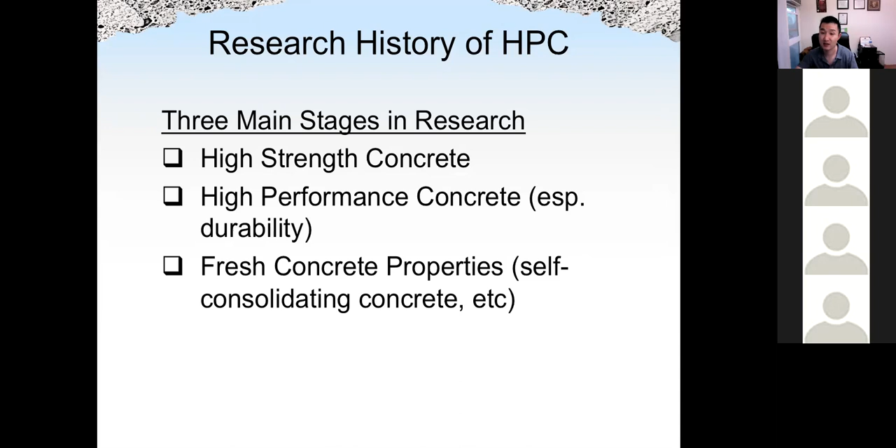For high-strength concrete, the goal is of course to enhance the strength as much as possible. This is useful for high-rise buildings, because by using higher strength concrete we can reduce the cross section of the concrete, and thus reduce the dead load of the building.

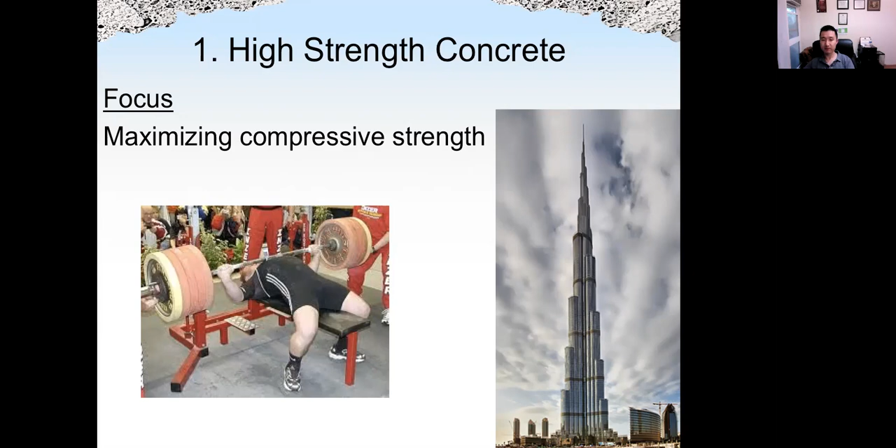But as we mentioned before, high strength is not equal to high durability. Some very old concrete may not be as strong as today's high-strength concrete, but they can last hundreds or even a thousand years. If a high-strength concrete has durability issues, it cannot last long. For example, concrete with high drying shrinkage or high autogenous shrinkage—even though the cement paste is very strong, shrinkage will cause a lot of cracking, which makes the high-strength concrete not very durable.

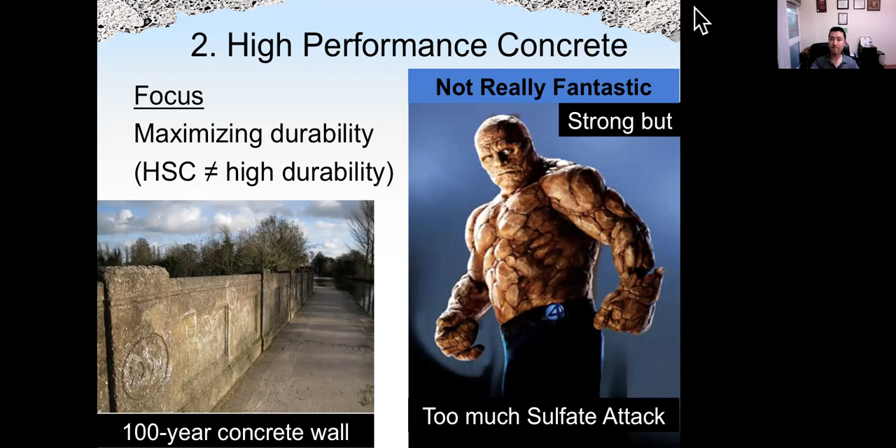If the focus is on high fresh properties, such as self-consolidating concrete, it can also be qualified as high-performance concrete. SCC will be one of the concretes we talk about in future lectures—it's a type of concrete which can flow under its own weight, can pump over a long distance, and can flow into every corner of the formwork. It's useful especially when we have very congested rebar in the formwork.

So I'll try to play a video for us, we'll see if we can play that.

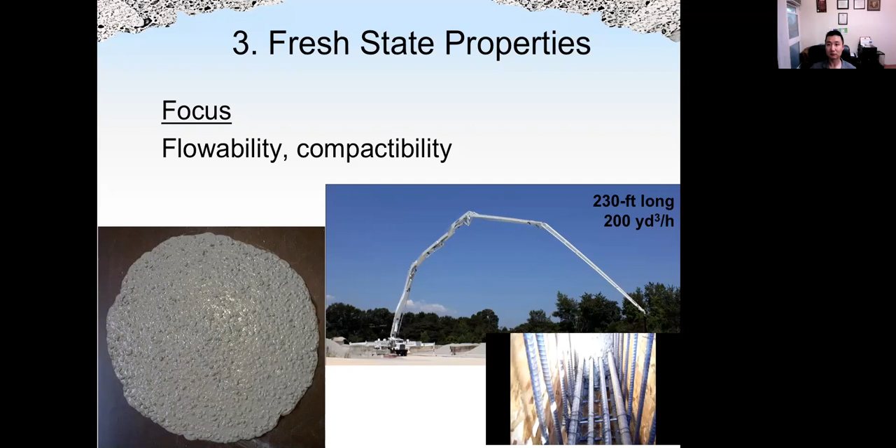To design high performance concrete, depending on what type of performance we design for—either high strength, high durability, or high flowability—we should focus on processing technology, the properties of the raw materials and final products, and properties based on chemical analysis and nano- and microstructure analysis of the concrete materials.

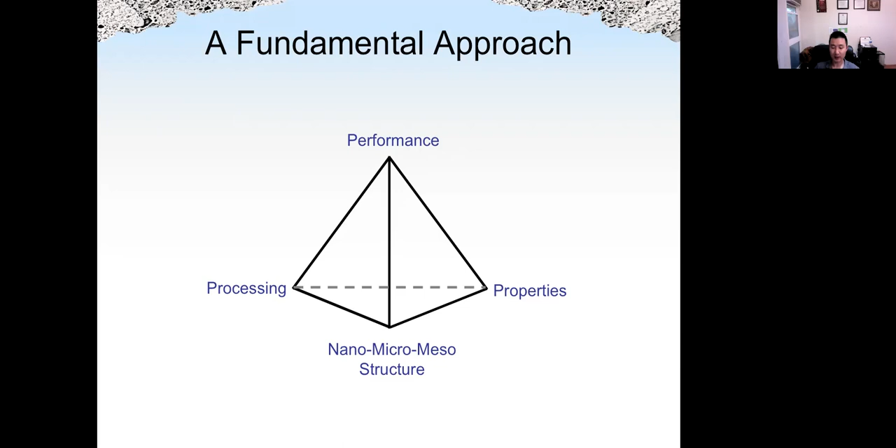Here we compare conventional concrete, high-strength concrete, and so-called ultra-high-strength concrete, depending on the strength level. We can see the water-cement ratios are quite different, and some use chemical admixtures such as superplasticizer to achieve high strength, because without superplasticizer it's very hard to achieve a very low water-cement ratio and fully compact the concrete.

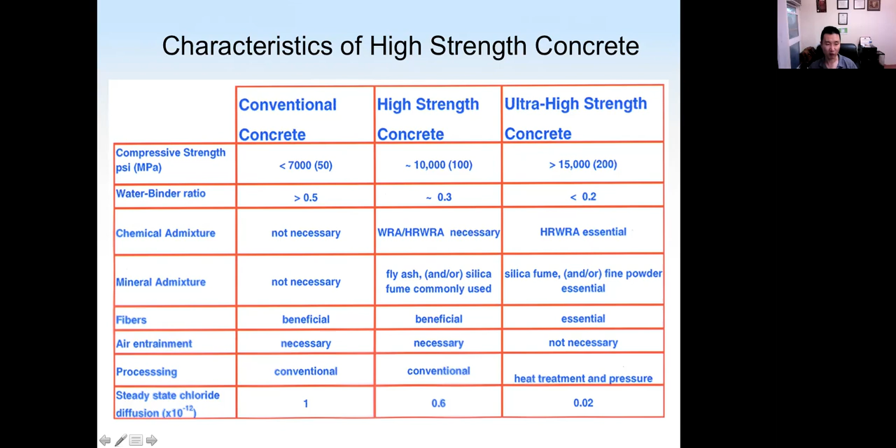Silica fume and fly ash are commonly used for high-strength concrete. Sometimes fibers are also used to enhance toughness—we will have a lecture covering fiber-reinforced concrete later this semester. We may also use heat treatment and even pressure to achieve ultra-high-strength performance.

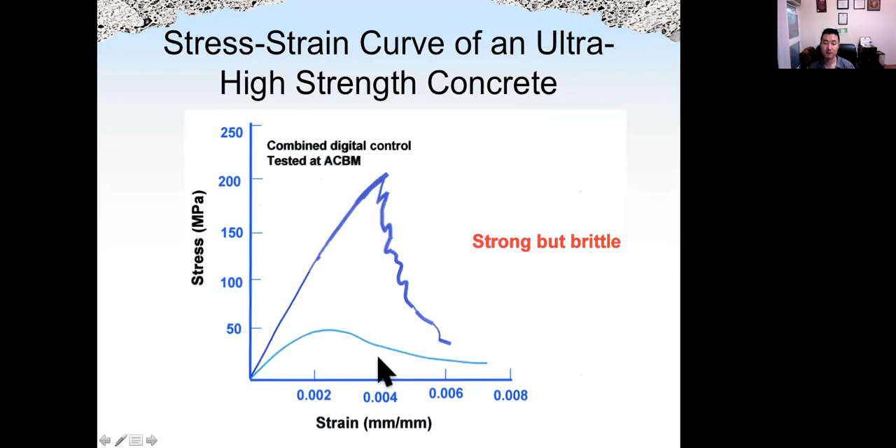This is what we discussed, the crack behavior for normal concrete. We call that crack localized. The cracks open up in a certain location, not all of the location, and in other parts of the concrete, even after the peak load, the concrete can still resist some of the load. That's why we have the post-peak behavior.

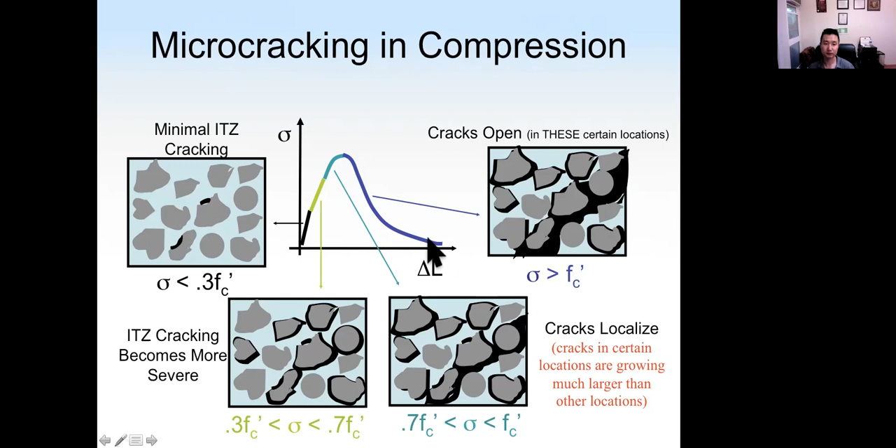But for high-strength concrete, all the components are very strong, so when cracks occur, they tend to propagate all through the concrete. So there's not too much post-peak behavior. High-strength concrete behaves more similar to cement paste or mortar compared with traditional concrete.

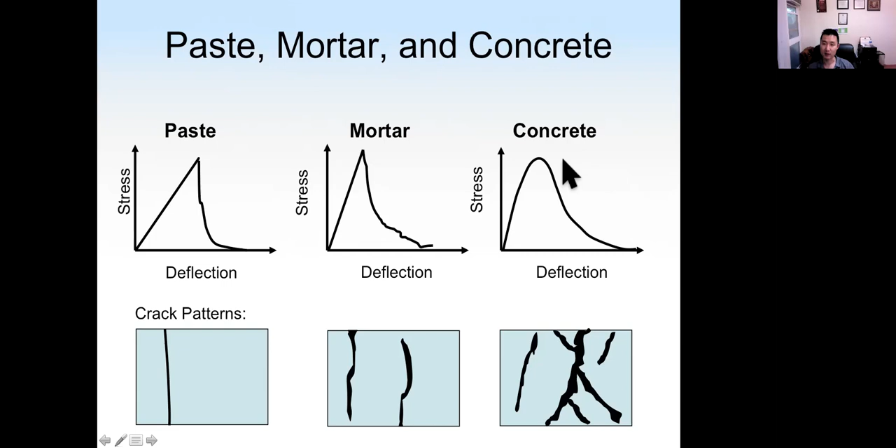This is one of the early projects, around 2008 to 2009, that I did before I joined UH as assistant professor in 2011 — around 2 or 3 years before I joined UH. This is one of the projects: we designed ultra high strength concrete, which also has fiber in it.

The concrete needs to be strong enough to resist high-speed heavyweight truck impact, and also durable enough to resist the harsh marine environment. This is one of the security barriers in the San Francisco Bay Area.

We use particle packing theory trying to achieve a very dense matrix, not only for aggregate but also for the powder system, which means the cement and silica fume system. We focus on rheology behavior using admixtures and fibers, and also study the cement chemistry to ensure the hydration product is strong enough.

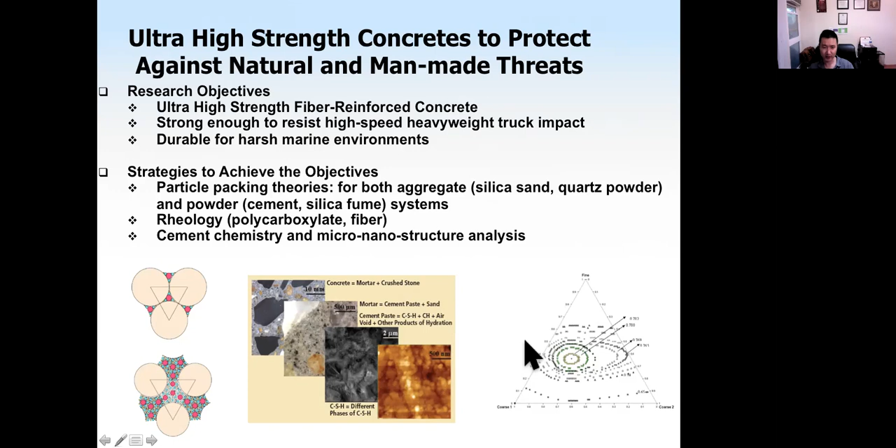The end result is ultra high strength fiber reinforced concrete with compressive strength more than 200 megapascal, very high flexural strength, and very, very low chloride diffusion rate, which means the concrete will be very durable also.

I'm not sure if I can play the video. The video seems not to work today. We have some video clips — hopefully I can play that next time for you.

This is the prototype test with a Ford F750 truck, a 15 kip truck traveling at 50 miles per hour, impacting the concrete barrier, which will serve like so-called street furniture. We have some plants on top of the concrete barrier and people can sit on it, but it's actually a very, very strong security barrier that can stop the truck within 3 feet, or 1 meter.

So this is some of the pictures of the impact.

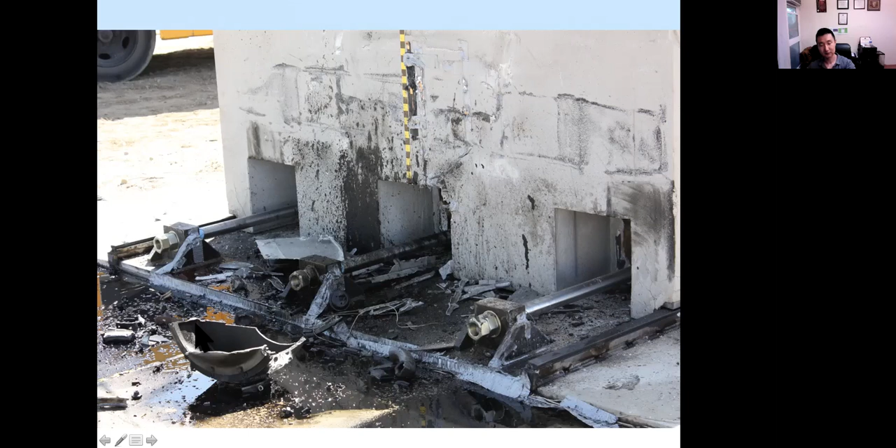The next part of today's lecture is borrowed from a lecture by Professor David Lange, who I think is currently the ACI president and a professor at the University of Illinois. He was my co-advisor for my PhD study. This is one of his lectures on designing or production of high performance concrete.

Basically, how can we achieve a strong and durable concrete? You will see a lot of this information already in this lecture — we know it already — but it's a very, very good review on designing high performance concrete.

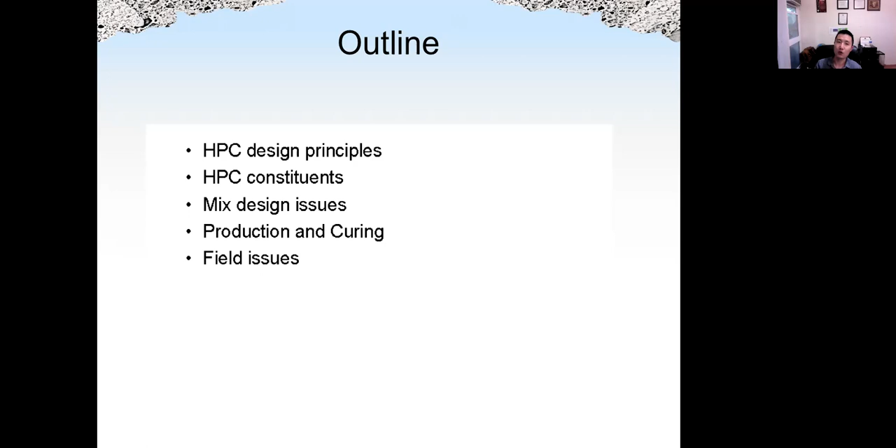HPC design principles: for hardened properties, we need to focus on a very strong matrix, which means the cement paste needs to be strong enough, the interface, meaning the ITZ or interfacial transition zone, and of course the aggregate.

Porosity controls the permeability, and the connectivity of the pores is also a big factor controlling concrete permeability. We know concrete permeability is very, very important for designing a durable concrete. And volumetric stability, meaning the creep and shrinkage of the concrete, should also be well controlled.

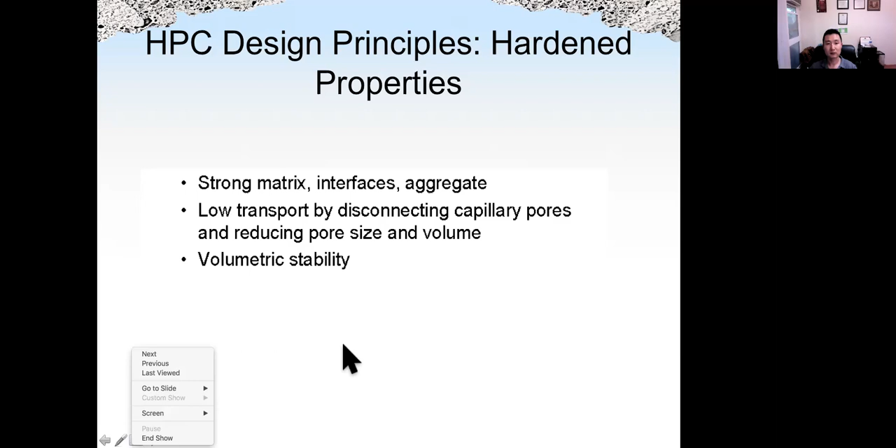So that is hardened properties. For fresh properties, the workability should be at least acceptable. For concrete with very low water cement ratio, it cannot be very flowable, but it should be at least workable, meaning we can fully compact the concrete.

The setting time should also be acceptable depending on the requirement of the engineers. That is controlled by the type of cement, the particle size or fineness of the cement, or what type of admixtures we put in the system.

Also the rate of strength gaining is controlled by the type of cement. For example, type 3 cement, we call that high early strength cement, so the set time and strength gaining speed will be faster compared to type 1 cement. Temperature is also very important — higher temperature means higher strength gaining. Set controlling admixtures, retarders and accelerators, will all control the strength gain.

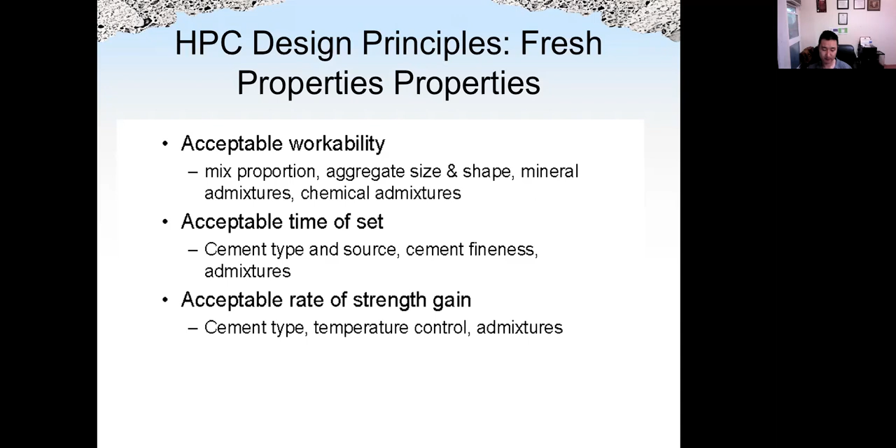How can we improve the strength of concrete? We have many methods to do that. We can improve the strength of the cement paste, the ITZ, or the aggregate. Remember the weakest link series - these are the three major components in concrete. We need to improve the weakest part, depending on many factors. If the weakest part is the cement paste, we should improve that. If the weakest part is ITZ, we should improve ITZ.

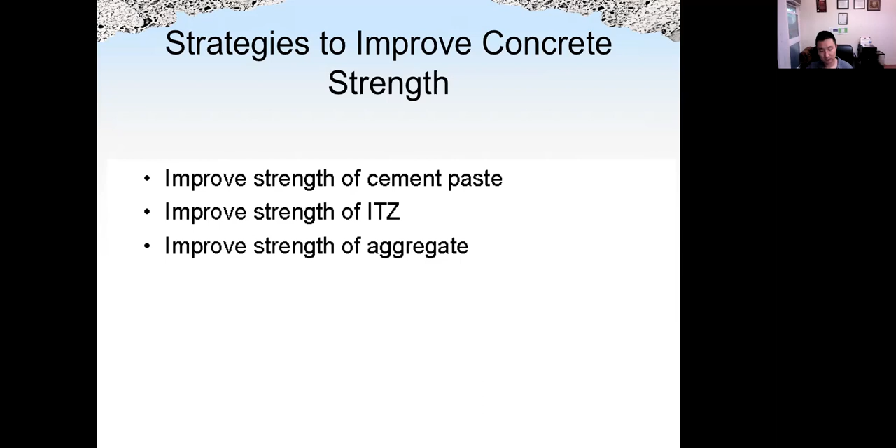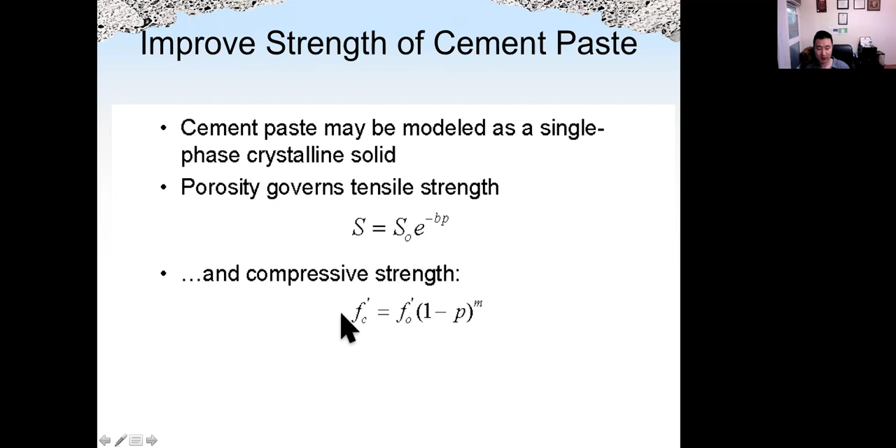For the cement paste, it could be modeled as a single phase solid. The strength of the cement paste depends mostly on the porosity, which is the P here. The lower the porosity, the higher the strength of the cement paste. So the main problem is how we can reduce the porosity, avoid larger pores, and refine the size of the hydration or the grain. If we can reduce the inhomogeneities, reduce the size of the interface, reduce the size of voids, we can reduce the major issues.

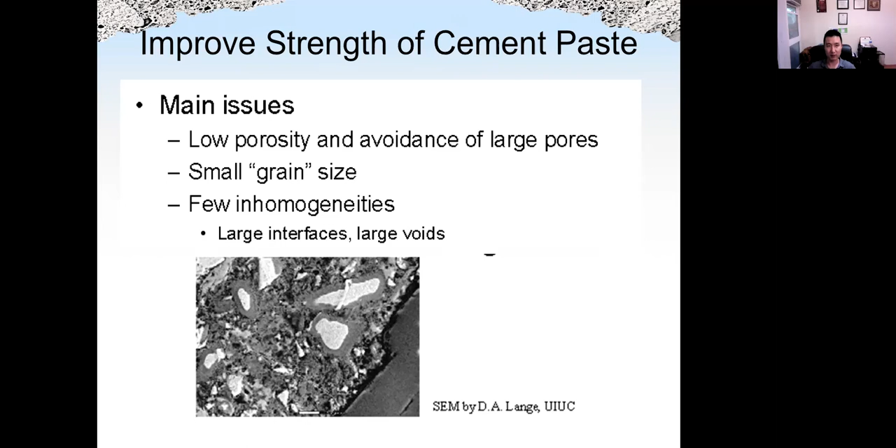The role of water-cement ratio: the water-cement ratio is the number one factor controlling the strength of concrete. Higher water-cement ratio means lower strength. Lower water-cement ratio gives us higher density and higher strength, but the setting time will also be shorter, and we have higher temperature due to higher heat evolution. The workability will of course be lower. That's why for high strength concrete, we need to put a superplasticizer in the system.

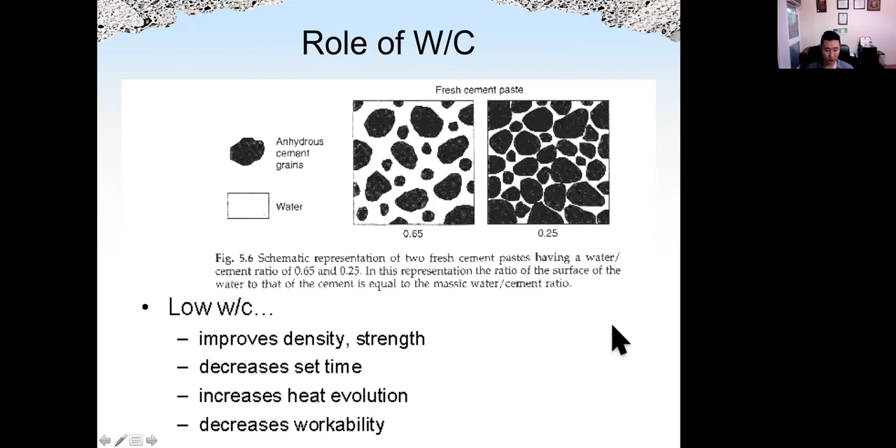So that is cement paste. Now let's look at the ITZ, which is the boundary between cement paste and the aggregate. ITZ is typically weaker if the water cement ratio is high, higher than 0.5, then we could have micro cracking in the ITZ due to drying shrinkage or thermal contraction. It's said that aggregate plays no role until the water cement ratio is less than 0.5 - that means when the water cement ratio is high, the weakest link is in the ITZ or the cement paste, so aggregate plays no role.

When the ITZ and the cement paste are strong enough, or stronger than the aggregate, then it will play some role to control the strength. The aggregate needs effective stress transfer - without a strong ITZ, the stress from the cement paste cannot transfer to the aggregate.

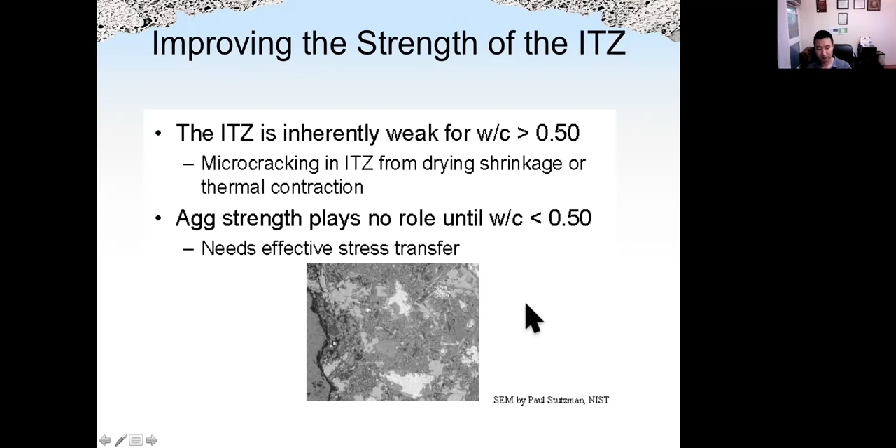For cement, optimum fineness: the smaller the particles, that is good for strength, but too fine is bad for rheology, because we need more water to mix the cement paste. Smaller particles have higher surface area, so we need more water to achieve the same workability.

If we can reduce the amount of C3A, we could avoid some setting problems. A higher percentage of C3S and C2S lets us generate more CSH and improve the strength of concrete. ASTM types are not optimized for high performance concrete due to high percentage of C3A, but that's probably not something we can control.

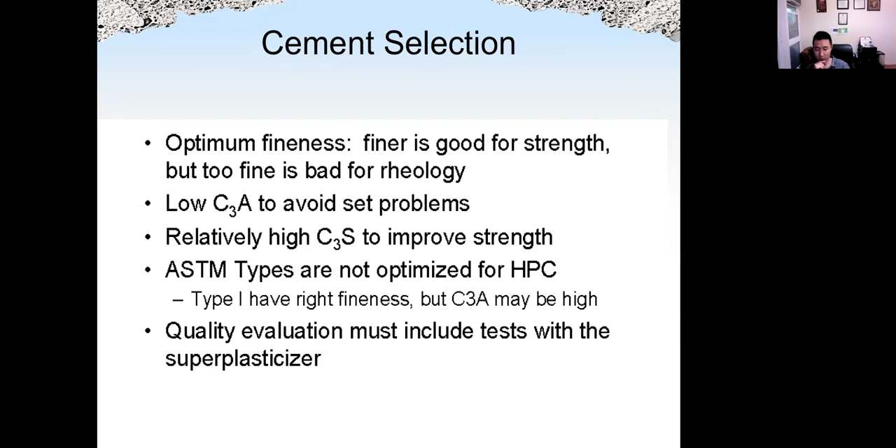For mineral admixture, such as fly ash and slag, we know the pozzolanic reaction transforms calcium hydroxide into CSH. That is due to the so-called filler effect - because Portland cement size is around 10 micrometers, and silica fume is around 100 times smaller, so silica fume can fill the gaps between cement particles. Fly ash has a more spherical shape, which can increase the workability of concrete. Slag is more angular shaped, and its size is also similar to cement particles.

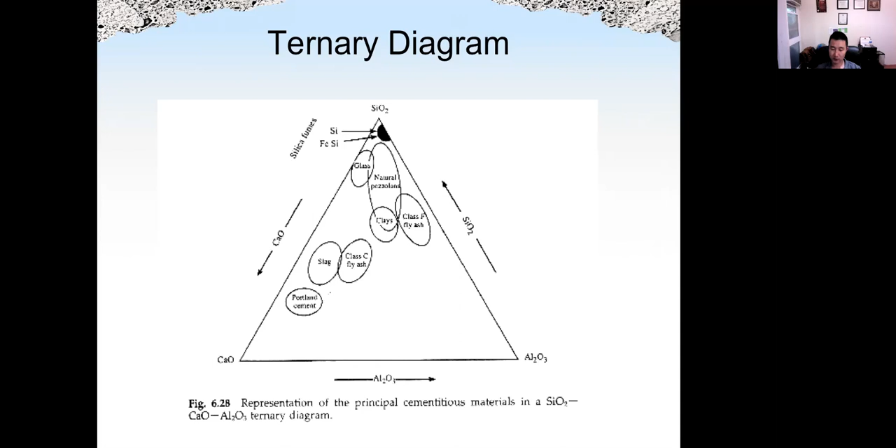For silica fume, the common dosage is around 3 to 10%. Sometimes we can use 15 or even 20%. But if we use too much silica fume, that will cost us a lot of superplasticizer, because silica fume is very fine particles, we need a lot of water and superplasticizer to achieve workable concrete.

The particle size for silica fume we know is very small, but it may stick together. We call that aggregation, so that will make the effective size of silica fume very large, sometimes even larger than typical cement particles. So that will impair dispersion or even generate ASR, because silica fume has a lot of reactive silica. So aggregation of silica fume, it may just act as the reactive aggregate. So pay attention to that.

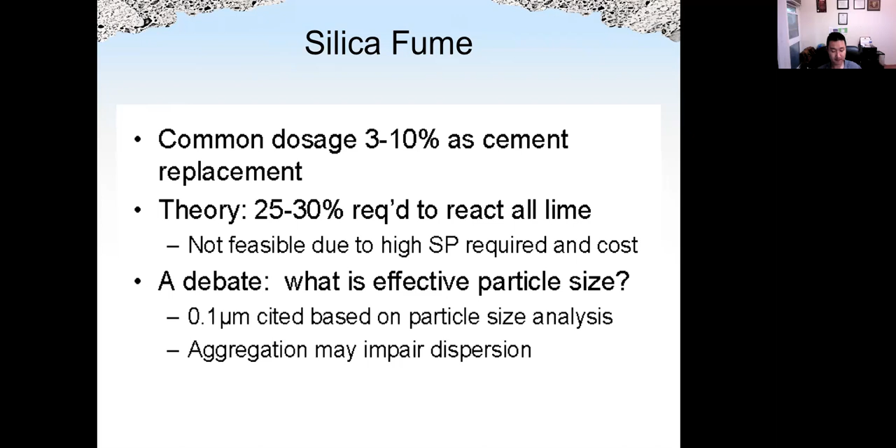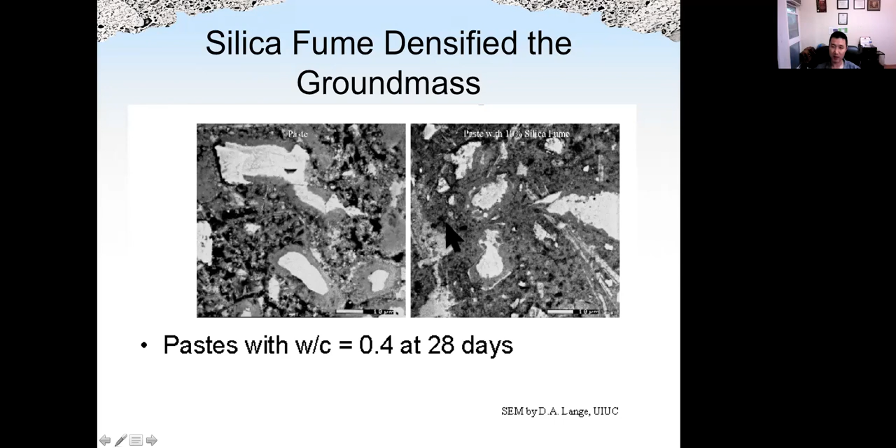For fly ash, the common dosage is around 15%, but we can use a much higher percent for now, even 100%. If you remember the guest lecture from the visitor on Tuesday this week, we can use up to 100% fly ash, but the quality will vary by source. Fly ash is a byproduct of coal burning process, so we need to care about quality control for fly ash.

It will increase the setting time and also reduce the early age strength of concrete. The cost of fly ash typically will be lower compared with cement, but that depends on where you're talking about. For example, here in Hawaii, the cost of fly ash is much more expensive compared with cement, about twice as expensive as cement, because we do not produce quality fly ash here in Hawaii.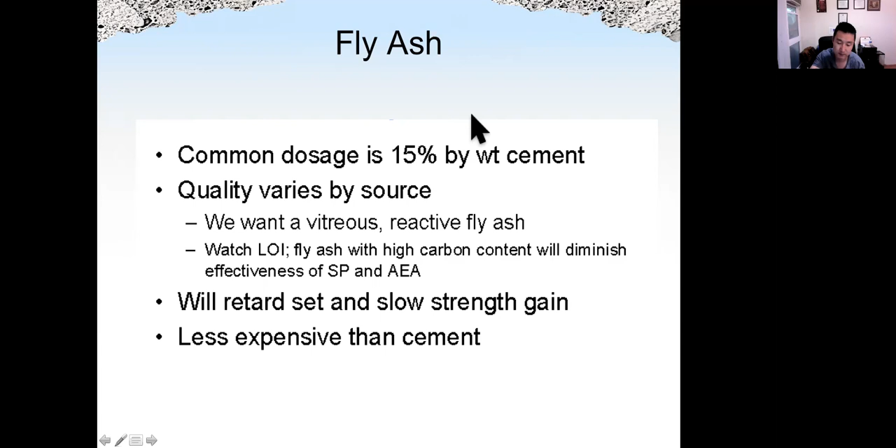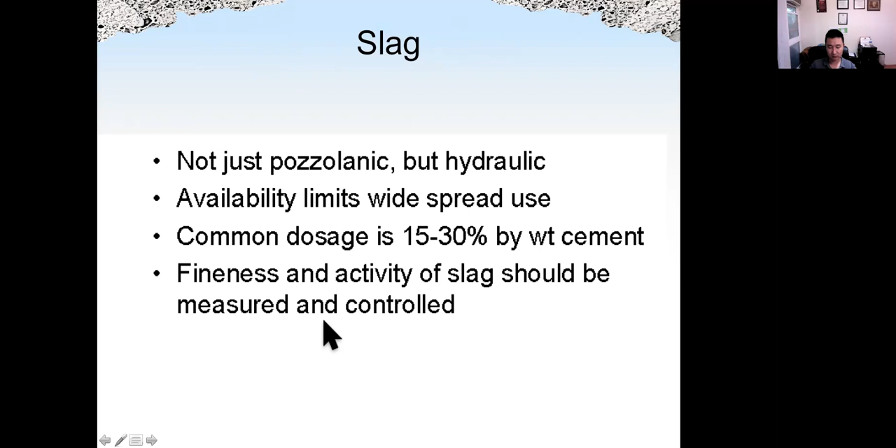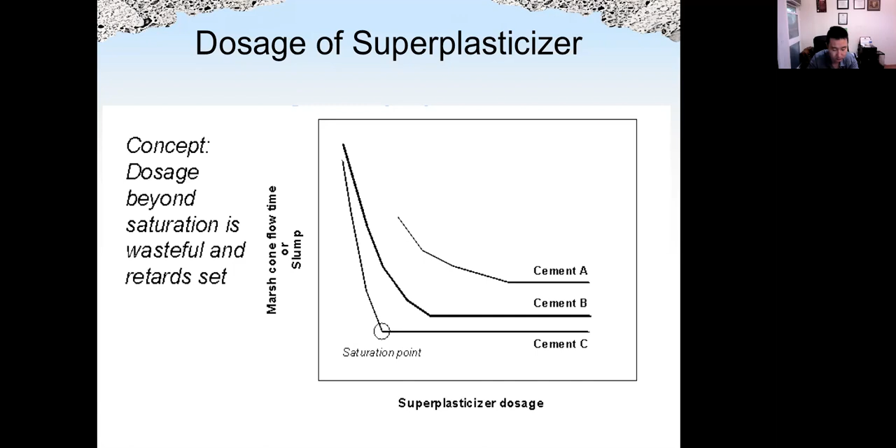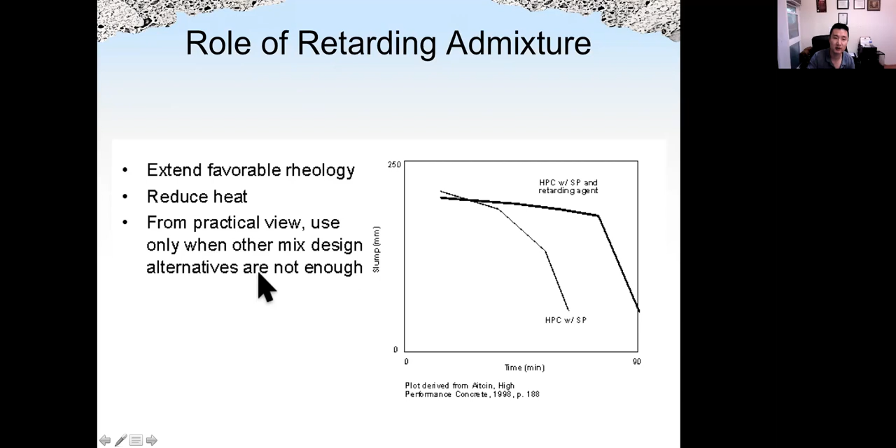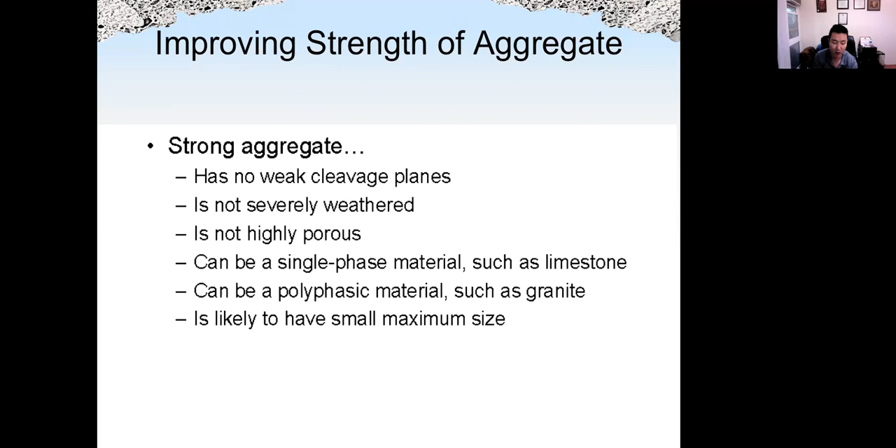And then let's look at the third component, which is aggregate. It can improve the strength of concrete. This may be important and may not be important. Here the strong aggregate has these properties, and the size of the aggregate will affect the strength of the concrete, as we know, and also the porosity.

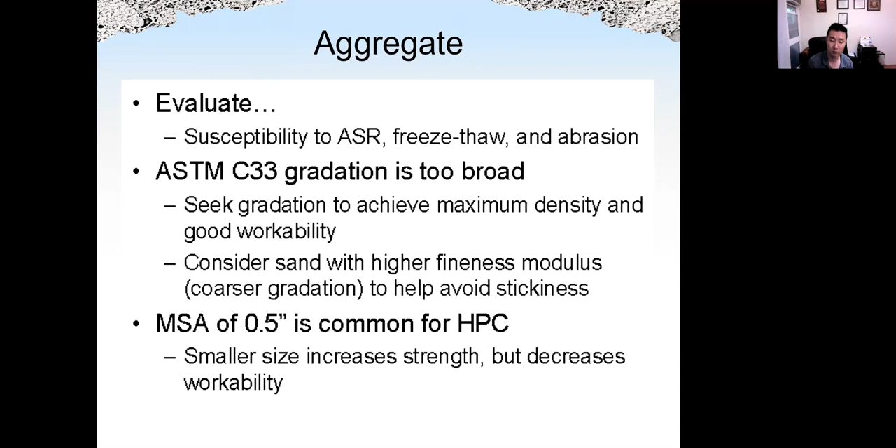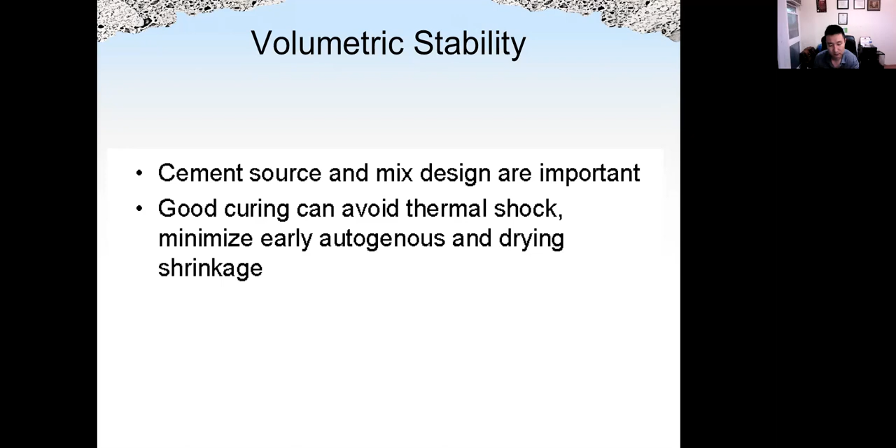From a lecture on shrinkage, we know for concrete with very low water cement ratio, it is very hard to control autogenous shrinkage, even with a lot of curing, because the cement is very dense. Water from outside cannot reach the drying pores caused by hydration. If we put in saturated lightweight aggregate, because the aggregate is everywhere inside the concrete, it will effectively reduce the autogenous shrinkage.

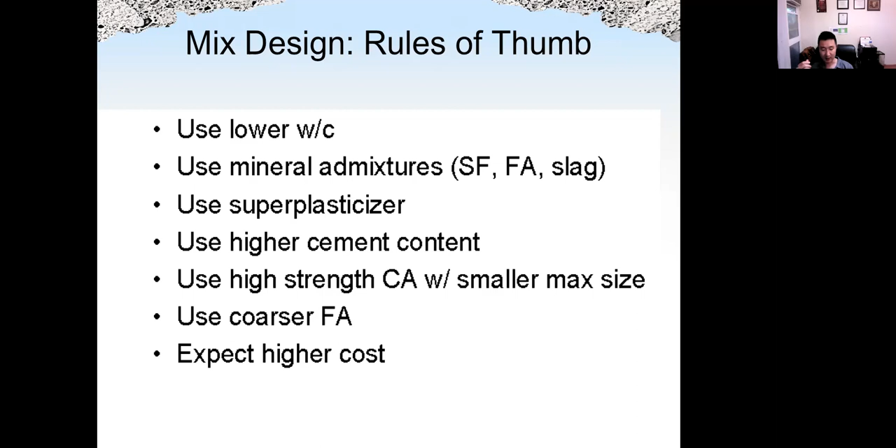So for high strength concrete or high performance concrete, the rule of thumb is we use lower water cement ratio if possible, use fly ash, silica fume, or slag, use superplasticizer if workability is a concern, and use higher cement content to compensate for the lower workability. Reduce the size of aggregate, use high strength coarse aggregate, and use larger size sand or fine aggregate. But the cost will be higher because of these materials.

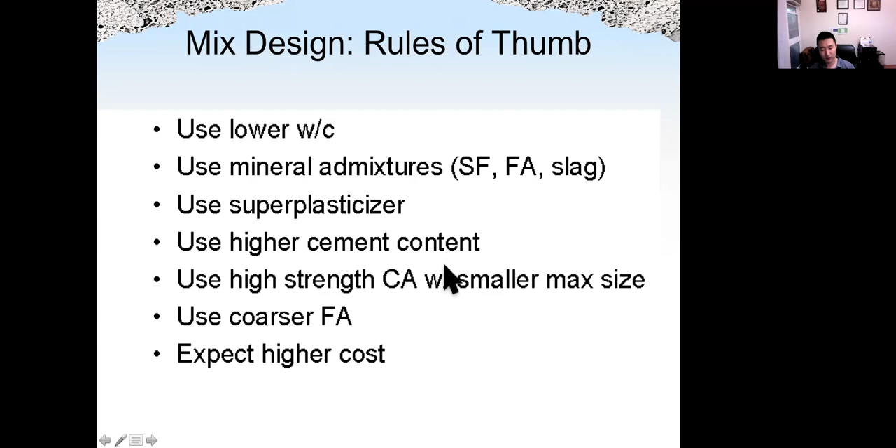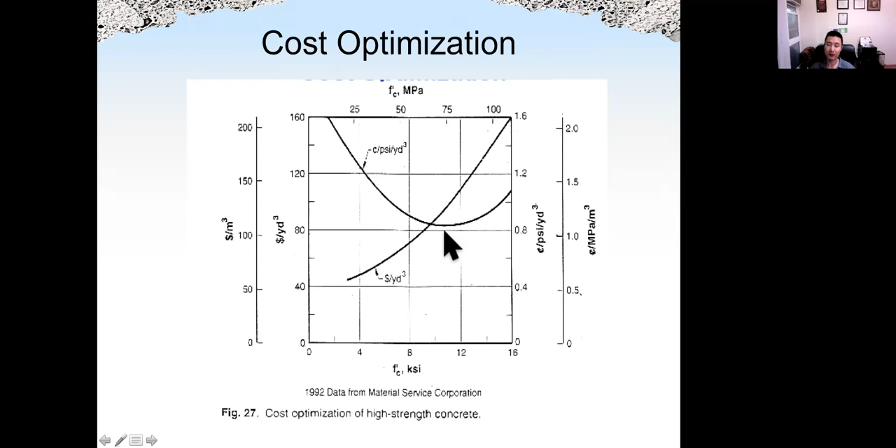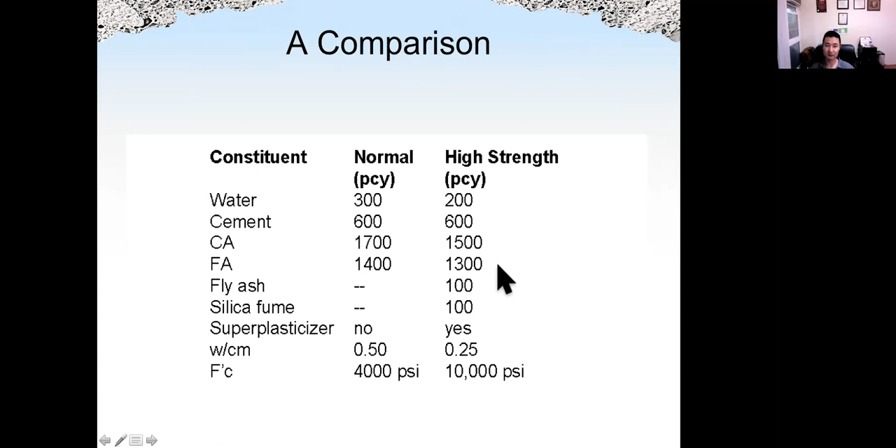Here shows two mix designs for normal and high strength concrete. Water cement ratio is quite different, and the strength is also very different. For normal concrete, it doesn't have fly ash and silica fume, and high strength concrete has less amount of aggregate. So ACI 211 is the mix design for normal concrete, and we know it has limitations when we talk about how to design normal concrete.

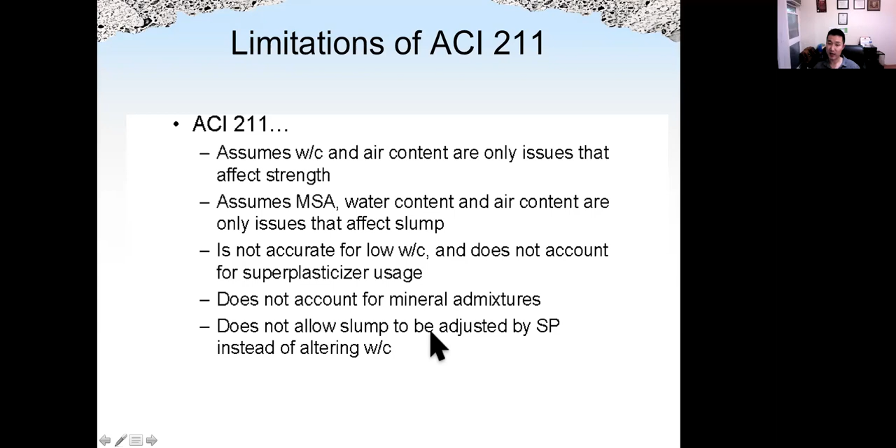For example, we assume water cement ratio and air content are the only issues that affect strength, and we assume maximum size of aggregate, water content, and air content are the only issues that affect slump. I think we discussed this when we talked about how to design normal concrete in lecture number 10. It doesn't consider mineral admixture at all, or any chemical admixtures, and doesn't really consider different types of cement admixtures.

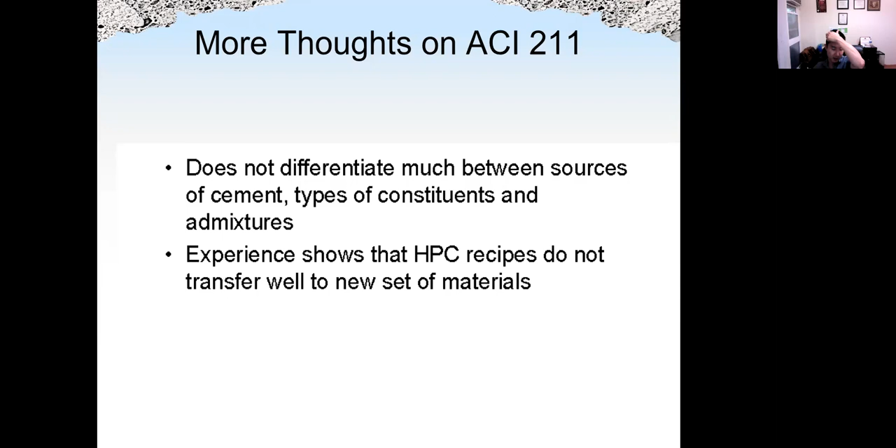So to design high performance concrete, basically we cannot use the ACI 211 method. But the committee from ACI also gives some guidance on designing high performance concrete. For high performance concrete, we know the slump is controlled not only by water, but also by superplasticizer, and the water cement ratio is not only a factor for strength, but also silica fume and fly ash. Both of these are not considered by ACI 211.

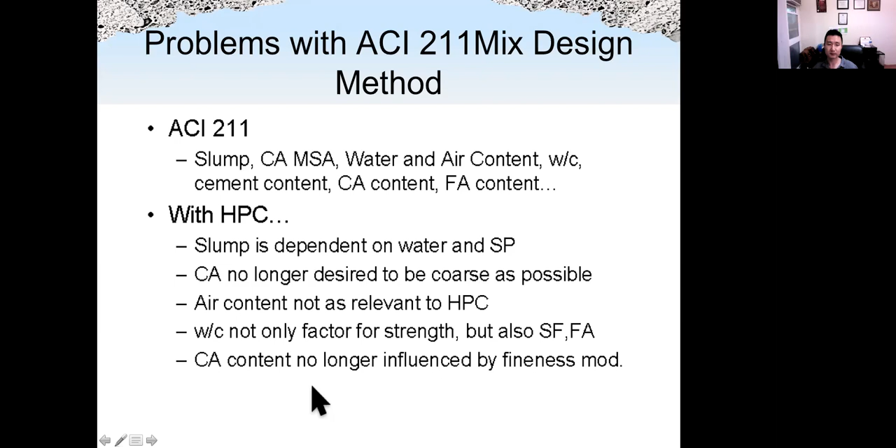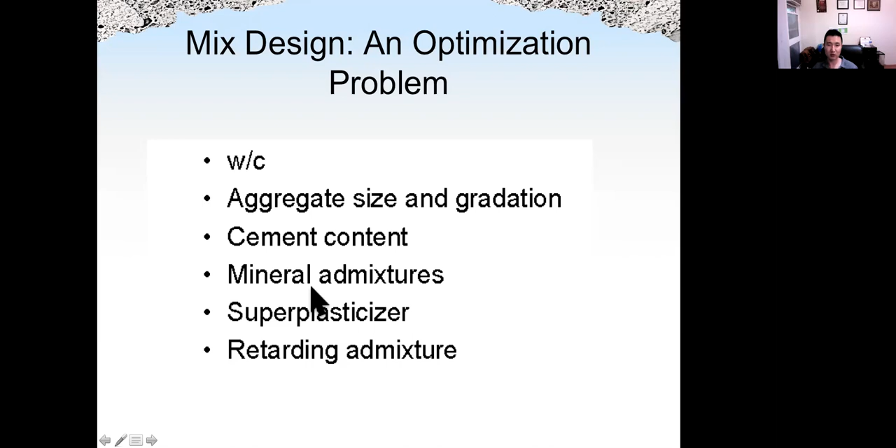So the mix design is basically an optimization problem. We need to optimize by considering many factors - not only strength, not only shrinkage, but also cost and other factors. We need to decide the water cement ratio, the size and gradation of aggregate, the type of cement and how much cement we use, and the type and dosage of admixtures, both mineral and chemical.

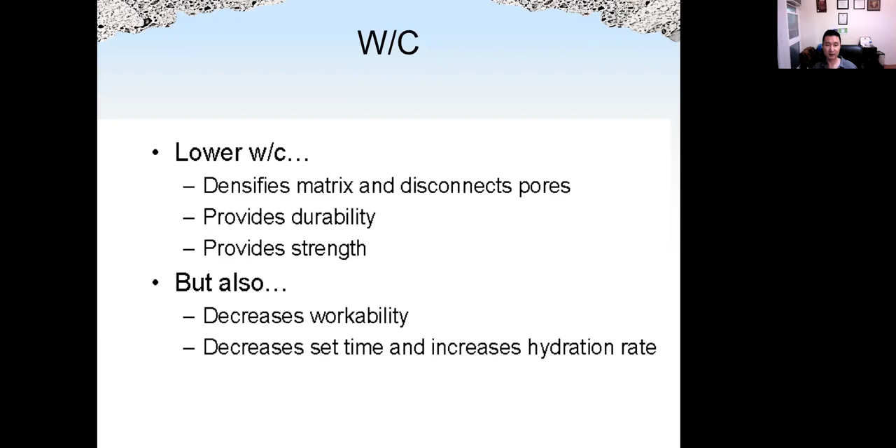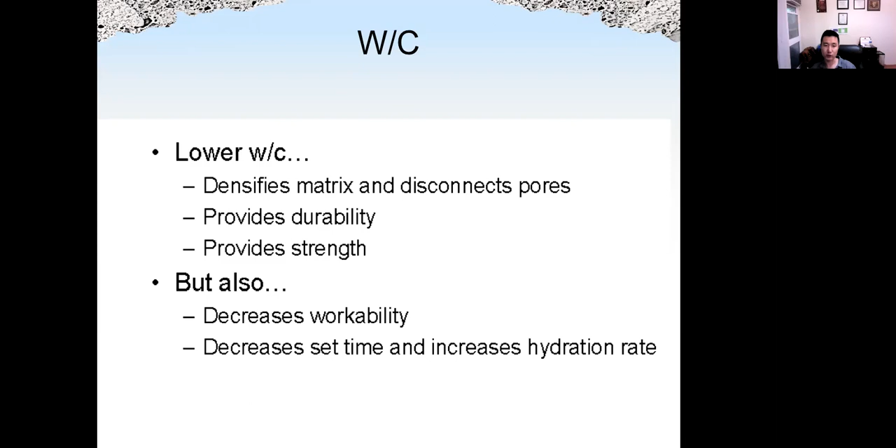Look at water cement ratio. Reduce the water cement ratio and we can densify the matrix, disconnect the pores. That's good, because it will provide durability by reducing the porosity, and it will also increase the strength. But it will also decrease the workability, decrease the setting time, increase the hydration heat, and potentially increase the autogenous shrinkage.

For aggregate, smaller, well-graded coarse aggregate is stronger. It will also improve the packing density of aggregate, but it will increase the demand for water because we have a smaller particle size with higher surface area, so workability will be lower.

For cement content, if we increase cement content, it will generate higher strengths, because for the same water cement ratio, we have better workability and better compaction. But higher cement content will increase potential for thermal cracking, increase dry shrinkage and autogenous shrinkage, because only the cement paste will shrink, aggregate will not shrink, and of course the cost will also be higher.

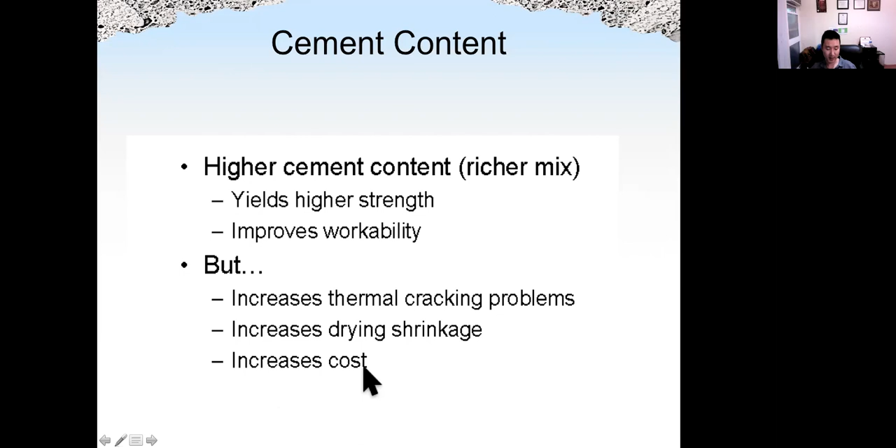For mineral admixtures, silica fume will increase the strength, but cost will be much higher. Silica fume is 10 times more expensive than cement. Workability will also be lower because the particle size is small.

For fly ash, it will increase the strength, reduce the cost, improve the workability, but delay the strength gaining speed. If you want higher early age strength, you cannot use fly ash.

For superplasticizer, it will increase workability, so we can allow a lower water cement ratio. It is essential for high strength concrete. Dosage, how much you use, is very sensitive. And slump loss, which is loss of slump of concrete over time, is a potential concern when we use superplasticizer. Also sometimes we have so-called compatibility problems with cement and other types of admixtures.

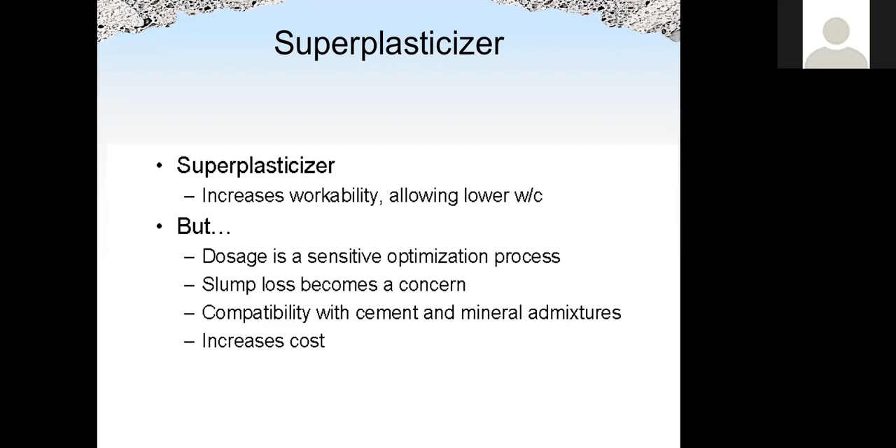On the last slide, just a reminder, why does fly ash reduce strength? It reduces the strength gain, which means it reduces the early age strength. The final strength will be higher, it just takes longer to get there. Why is that? It slows the reaction, because the pozzolanic reaction is slower compared to cement.

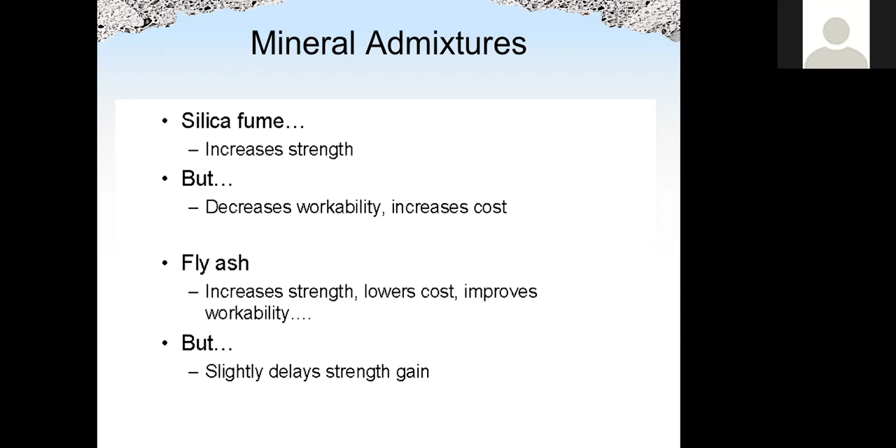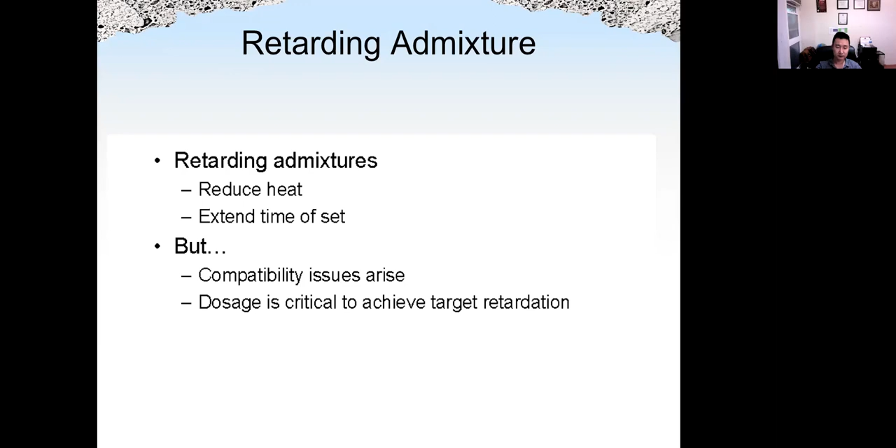ACI 211 does give some guidance to design high strength concrete. This is ACI 211 4R, the first revision from year 93, so right now they must have a current version. This is for designing high strength concrete with Portland cement and fly ash. And ACI 363R is a revision from year 92 - again they must have a current version for that - the state of the art on high performance concrete.

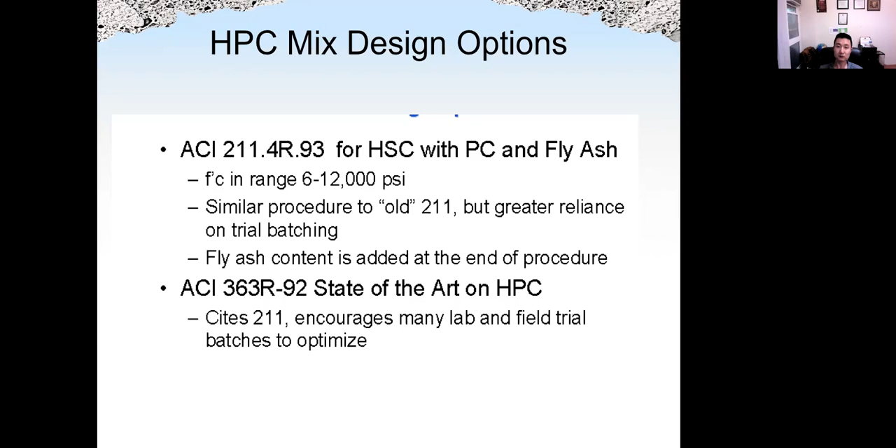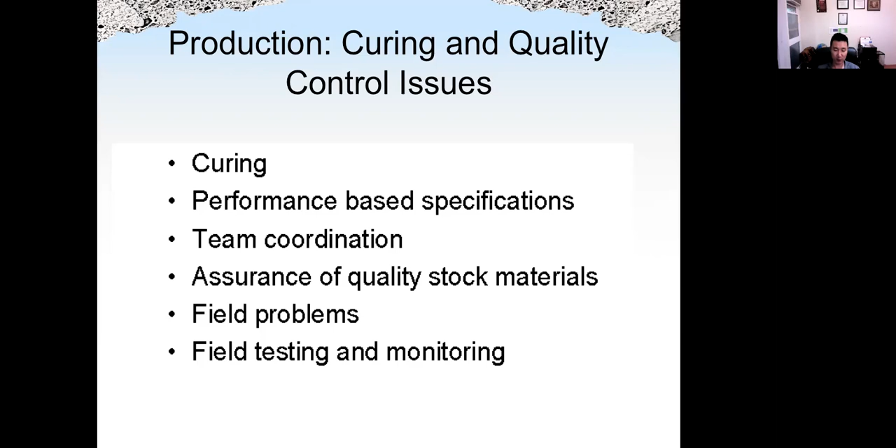Then let's look at the production, or the quality assurance and quality control issues for high performance concrete, including curing, performance-based specs, team coordination, assurance, and the potential problems we see from the field. We'll just quickly go over that.

For curing issues, for water cement ratio lower than 0.45, putting in more water is the best approach, or the water-added approach, because for concrete with lower water cement ratio, we better provide more water to the system, to ensure it doesn't have too much shrinkage, and because the water cement ratio is too low to complete the hydration. The long-term effectiveness is questionable because the pores are very small and close off, which means the permeability could be very low, so curing may not be very effective.

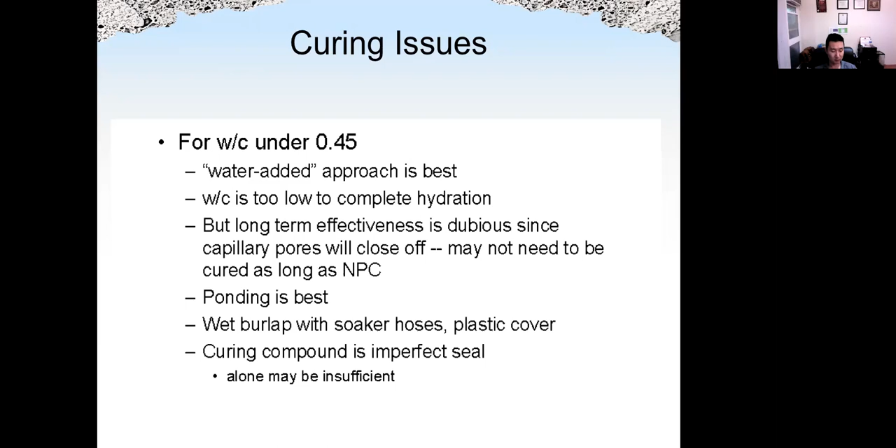Emergency alert - today these days I get a lot of flash flood warnings. Just be careful driving outside.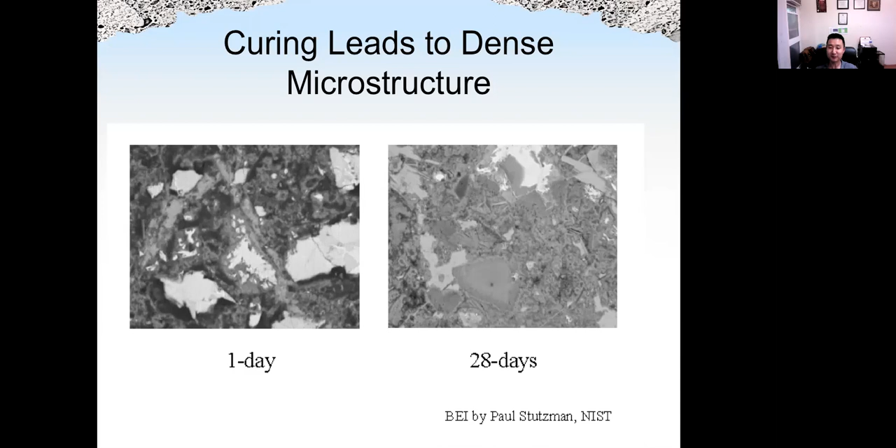Performance-based specs: high-performance concrete is very sensitive to small changes. One mix design does not fit all, so it is best to specify properties and allow the engineers and material supplier to adjust, and also the contractor to adjust based on the performance requirements.

Try to do a lot of trial mixes, and verify in the lab and in the field before actual usage. For example, we tried to design SCC for the state of Hawaii. Everything was good in the lab, but in the field, because SCC is very sensitive material, small changes in gradation of aggregate or moisture content may suddenly cause the performance of SCC to not be good at all. So keep that in mind.

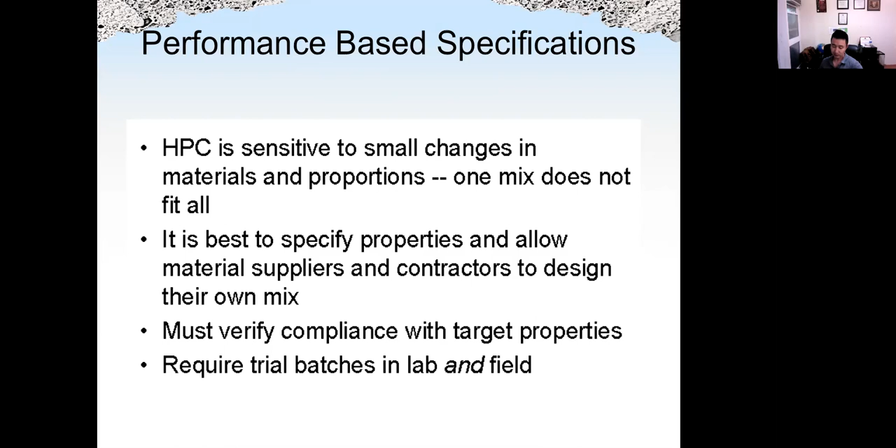Team coordination between the supplier, engineer, and contractor is very, very important when you start working, and assure quality of stock materials. We should check if the materials comply with the specs, and if not, we should allow time to do the correction. Also be cautious when we change the source of chemical admixtures.

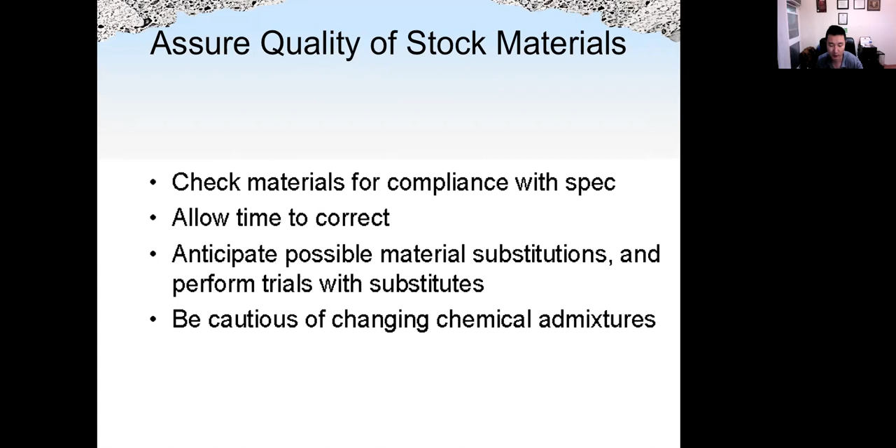Common problems with fresh properties of high performance concrete: because we tend to use a lot of superplasticizer, we will have higher slump loss, or low effectiveness of vibration, because the concrete may be very sticky due to low water-cement ratio and a high percentage of silica fume, for example. Or the concrete is very sensitive to water content.

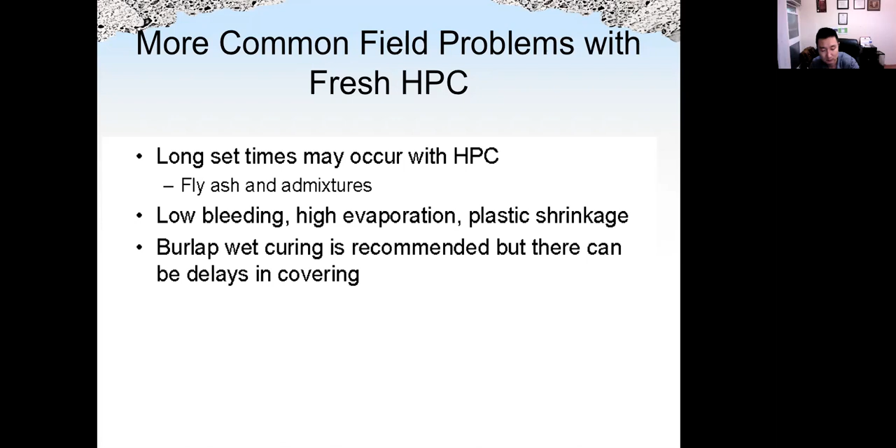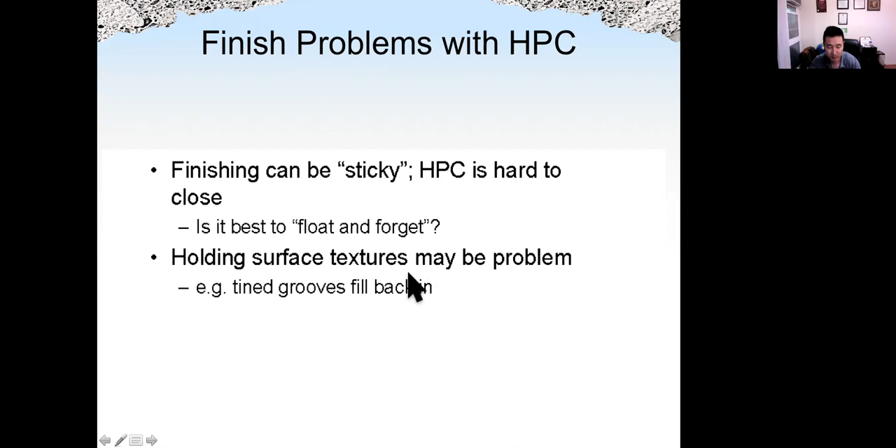Temperature and strength monitoring: high heat of hydration could be a concern due to low water-cement ratio and higher amount of cement. High early-age thermal cracking may be the result. To compensate for that, we can use a retarding agent to slow down the hydration, or we use fly ash or slag, or we can even reduce the temperature of aggregate by adding ice into the mixing water. This is a common practice during summer concreting.

High performance concrete will obey maturity laws. If we monitor the temperature change using thermocouples to track the heat, we can relate that to the strength gain.

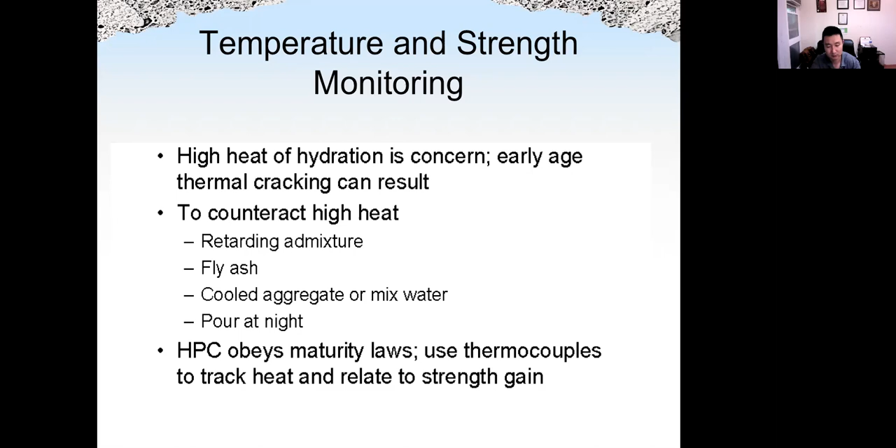Here you can talk about how and when we test the strength of concrete. Normally we check the strength at 28 days, but because we may use silica fume, retarder, or fly ash, 14 days or even 7 days is sometimes also required. If we use fly ash, we may check the strength at 2 months or even 3 months because hydration will be slower. We could also use different sizes or materials for the cylinder. All this will affect the result a little bit, but that will save us some problems. We can do more tests for different days.

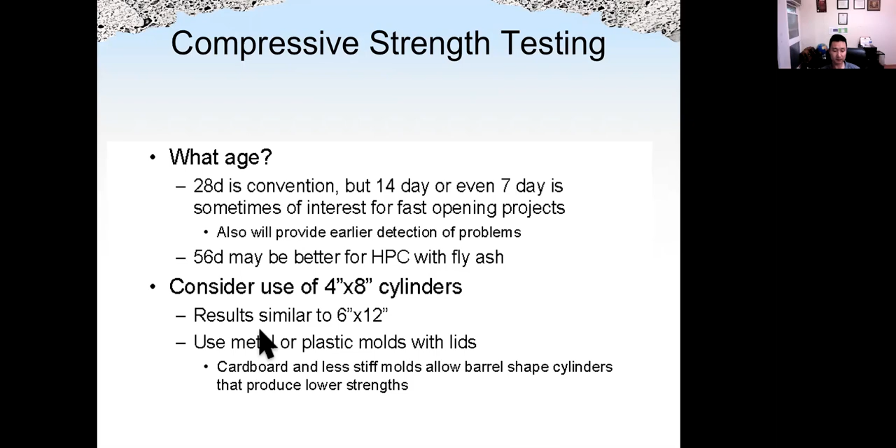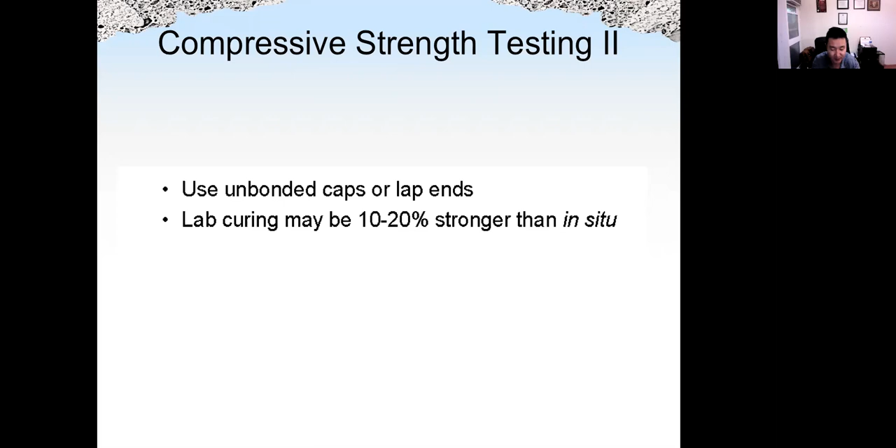Different curing processes, or even the caps and conditions, may affect the strength difference between the test result from the lab and the in-situ strength.

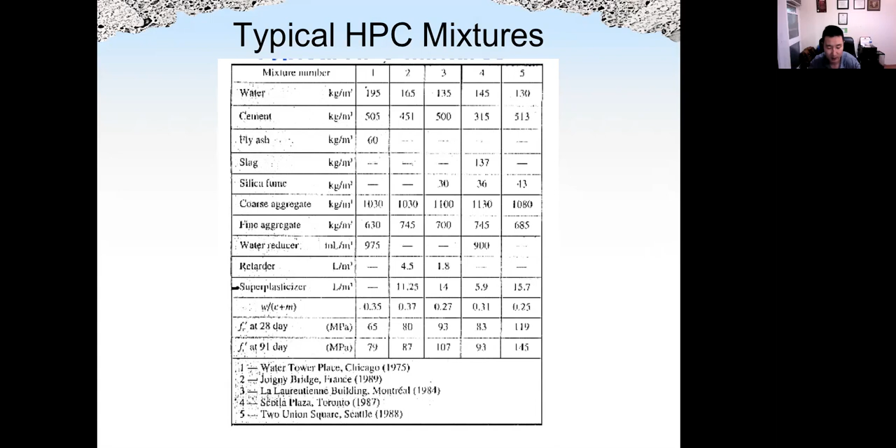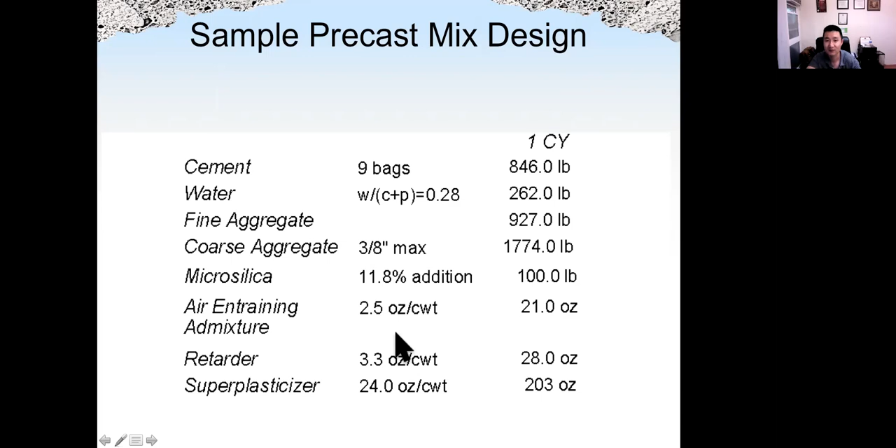This is another sample mix design for precast concrete, and that's the result for high performance concrete: 11.7 KSI at 2 months. Very durable concrete with very good freeze-thaw resistance. Shrinkage is acceptable and permeability is very, very low.

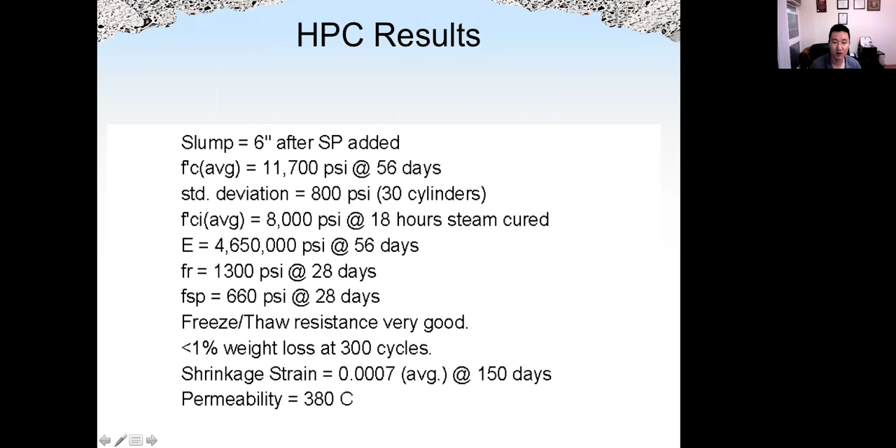So this is our first introduction lecture for high performance concrete. Here is the list of books, showing the authors and different types of mix design for high performance concrete, and also websites from the Federal Highway Administration, National Institute of Standards and Technology, and other websites for high performance concrete.

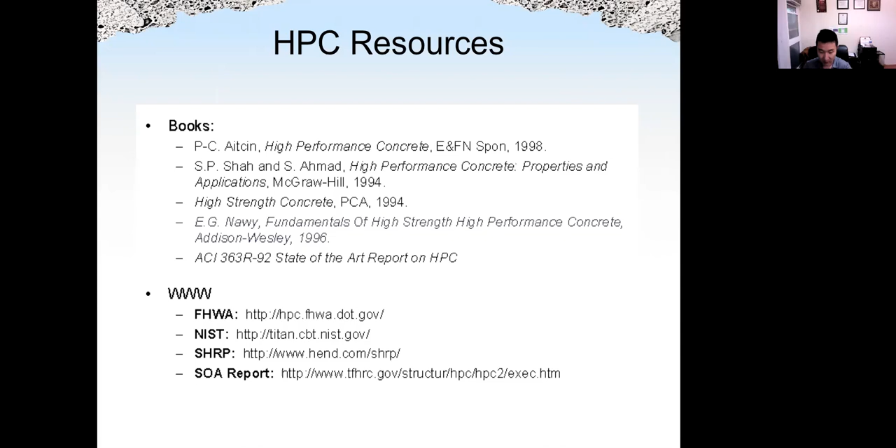The next three lectures, we're going to talk about different types of HPC, including SCC, fiber reinforced concrete, polymer concrete, lightweight concrete, and so on. But that's it for today.